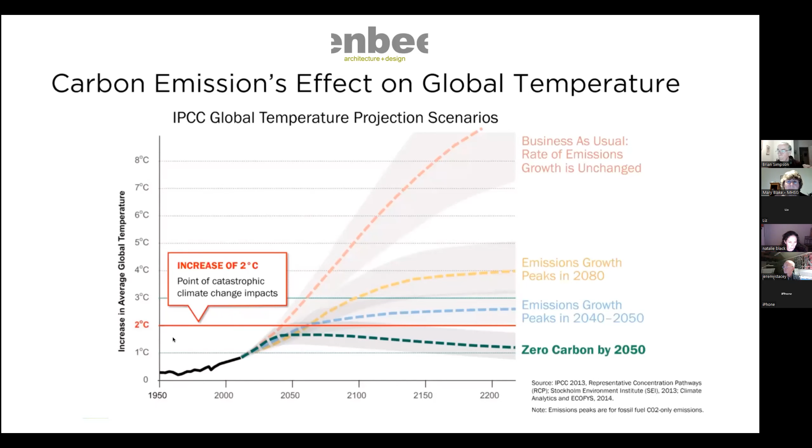So the first thing that I thought about was, what can I do? And a few weeks later, I went to EcoBuild, which is now called Future Build, and I came across a retrofit coordinator course. I also decided to educate myself a bit more about this situation and read Naomi Klein's This Changes Everything. And I joined some local campaigning groups, and we did an event in November 2015.

And I very much felt like this, I felt like standing on a soapbox, but I didn't quite have the courage at the time. And I certainly didn't imagine that we would all be talking about it, that everyone really would be talking about it by this year. In 2015, it seemed a topic that was hard to bring up.

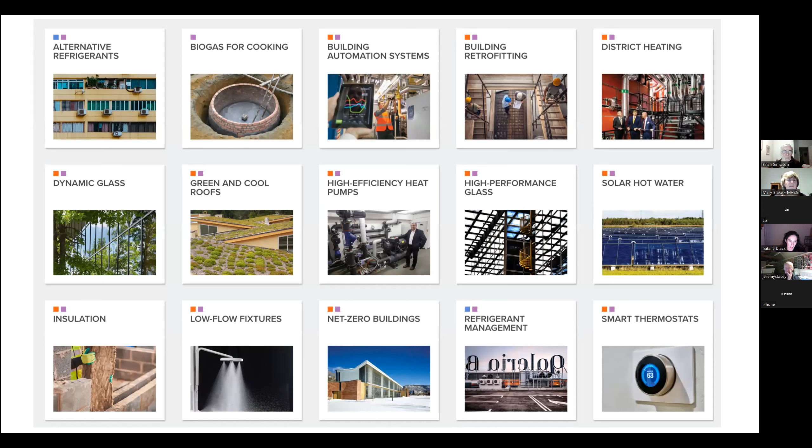And through my campaigning, I came across Project Drawdown, which has 100 ways that you can reverse global warming. And they have a lot of different solutions that are associated with the building industry. This is the ones that they've collected. So it turns out that I could do quite a lot.

And now I want to think about how much our buildings emit. Across the global sector, this is our global CO2 emissions by sector. It's 28% on heating buildings and lighting them, and then 11% on construction. But the construction kind of grows because the concrete and steel industry account for 23% of global emissions, and industry a further 20%.

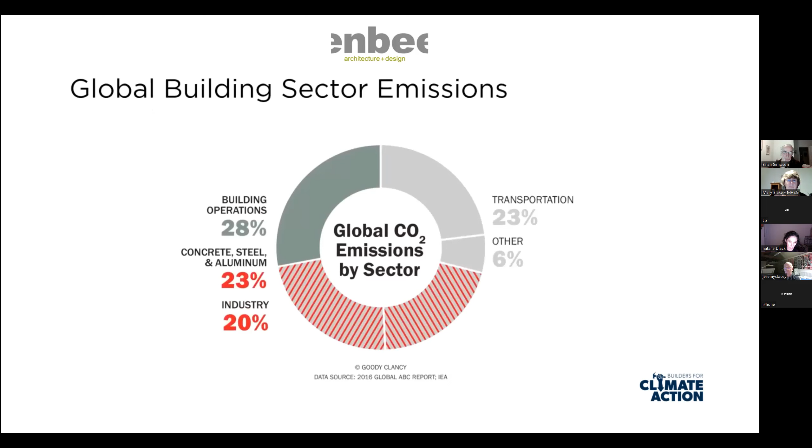So obviously, it's quite a big problem in that buildings emit such a huge amount — the building industry accounts for such a large sector of carbon emissions. But we also have an opportunity.

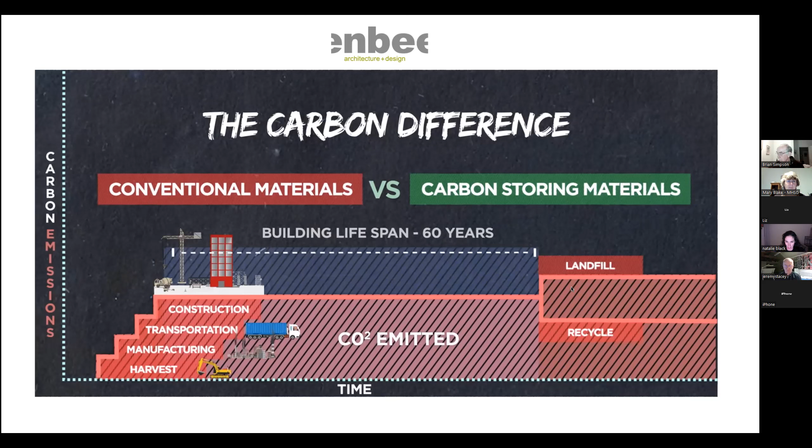And that is when you look at materials. So if you look at conventional materials versus carbon storing materials, which are materials that have grown and stored carbon in their growth, that makes quite a big difference. And this graph shows how, if we're starting at 0, conventional materials are starting at that point and creating a whole load of carbon, and over 60 years it's quite a bit of carbon.

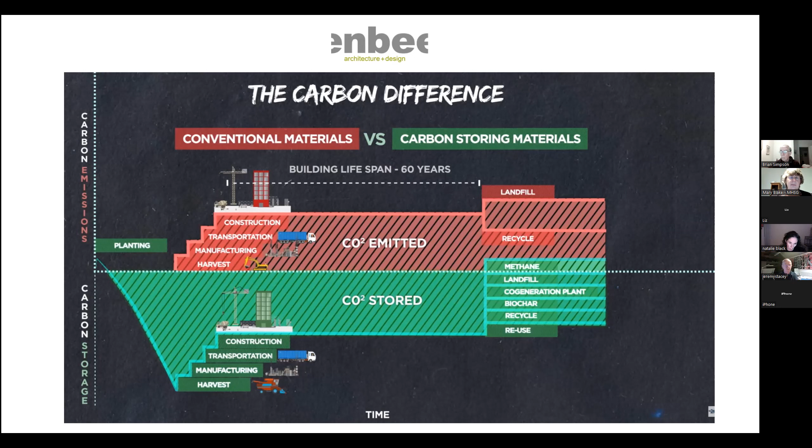And then if you take into account that it's a grown material, you can take that starting point to well below that 0 line. And then the theory is that although you might be using the same amount of carbon to harvest, manufacture and get it to site, you are below the line, and therefore it can be seen as a carbon storing material — it's a carbon storing building or addition to buildings.

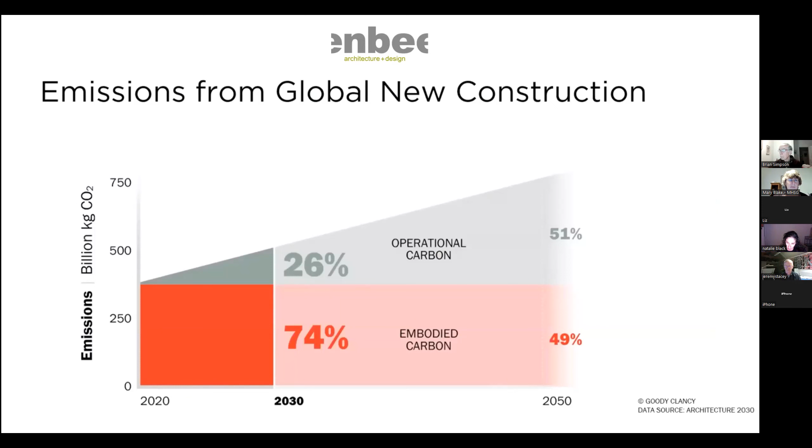So overall, between now and 2050, both operational carbon and embodied carbon end up being about the same amount. So they're equally important.

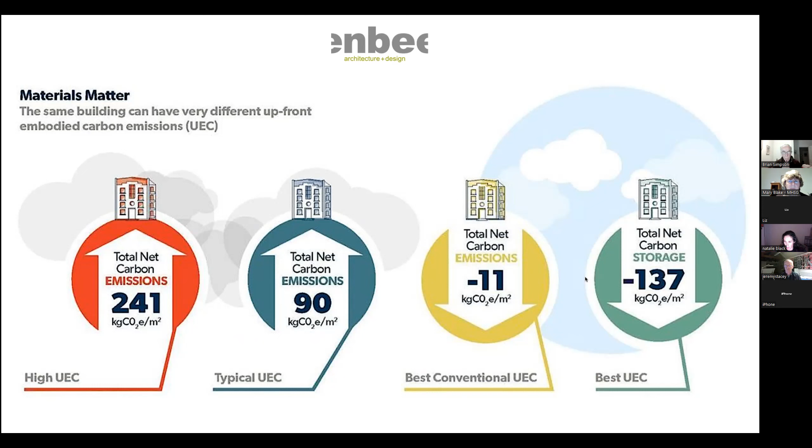And the building that I'm about to talk about could have been done in different ways. Say you had a new build: if you've got high carbon materials, they can be hugely emitting. You can improve the materials a bit and reduce the emissions. I think with us, we got to about the yellow, and I'm sort of trying to take my practice all the way to the green eventually.

So we can pivot the way we live and work so that it's not just an existential threat, but we are part of the solution. And retrofit is important because it's part of the solution, and it provides comfort, improved health, raises awareness, and potentially influences others. I very much believe that it's important to tackle this on every single project.

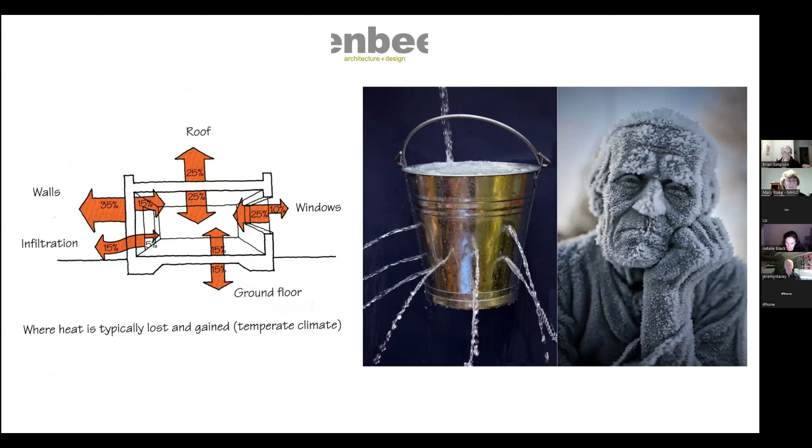And then there's the issue of our old building stock, which is leaking heat quite dramatically. These are some of the average heat losses across the different parts of the building. So we're leaking heat and we're also quite cold. And at the same time, we've got an energy crisis.

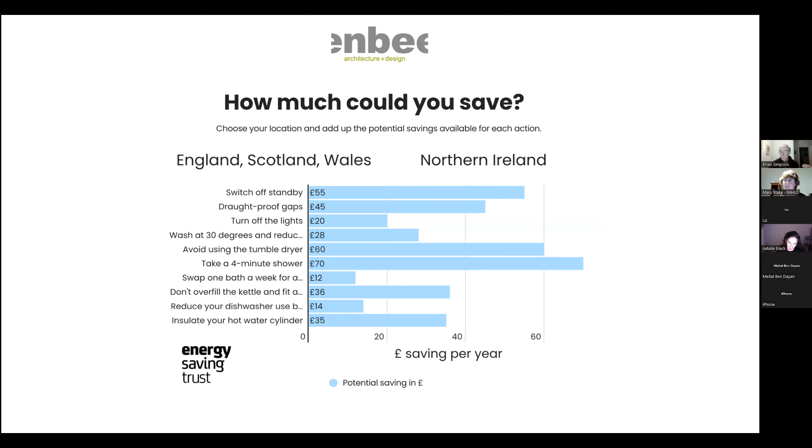This was a funny slide that I came across. Well, not funny, you could say it's sort of tragic and funny at the same time, but some suggestions for saving money, which in the context of the previous slides seem almost quite sad in a way.

Sorry, I can hear somebody talking, sorry. I don't know, excuse me, could everyone mute please? Someone, we're hearing a conversation coming in.

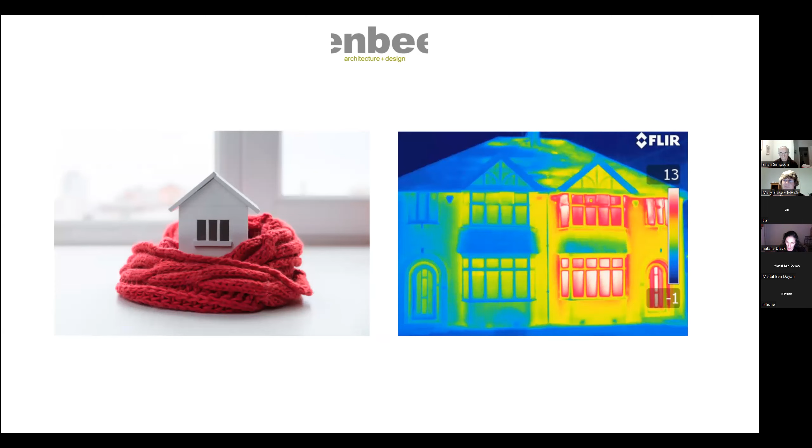Wouldn't it be better, instead of attempting very small savings, to do something like this, where we wrap the whole house in a woolly blanket effectively? The building here on the left has been retrofitted and the one on the right hasn't, and you can see the amount of heat loss coming out of the one on the right through this thermal camera. Just to give you a quick understanding, our homes use 35% of all the energy used in the UK and emit 20% of carbon dioxide emissions.

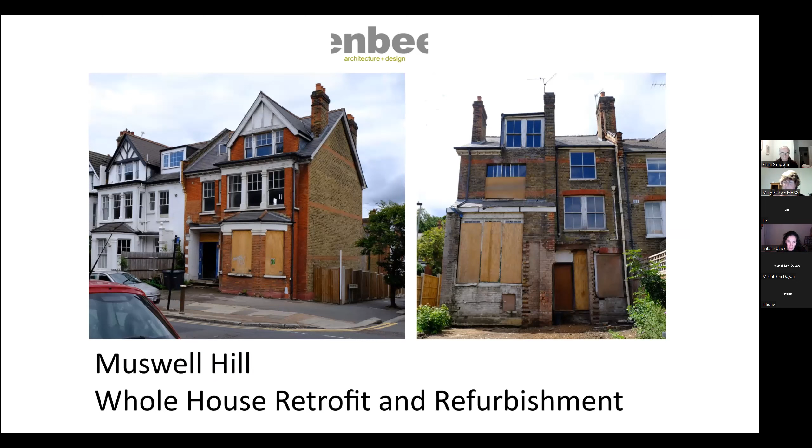So now on to the project. This is what we started with. And this is a bit of the inside once it had been stripped out, and the basement.

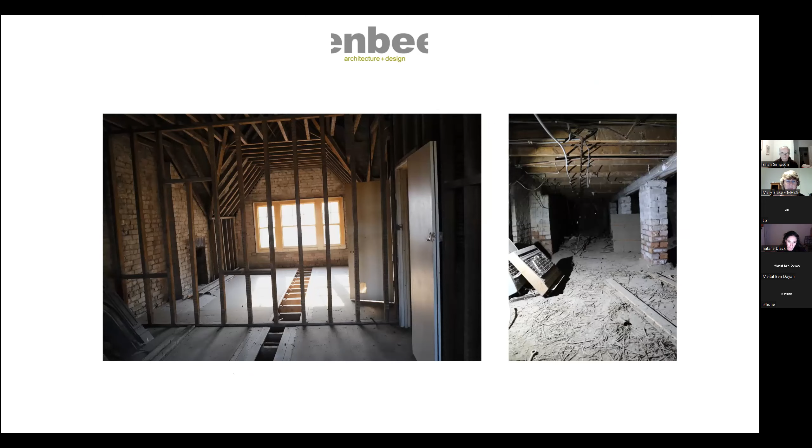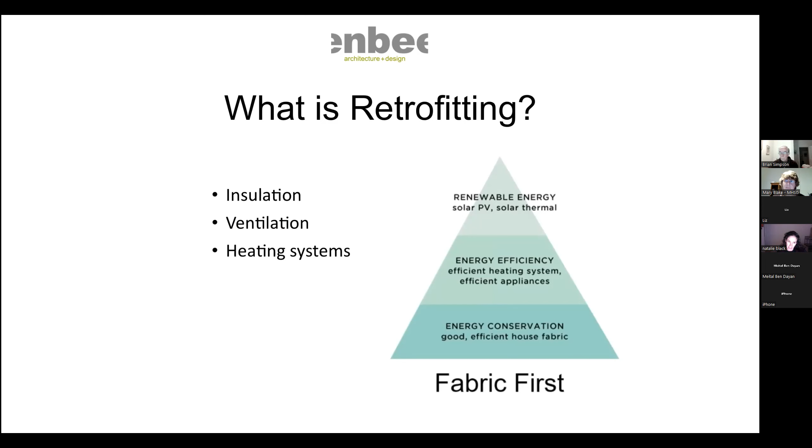Just to recap what retrofitting is, it's tackling the insulation, ventilation and heating systems. Today I'm going to talk in principle about the insulation, and not really touch on ventilation or heating systems.

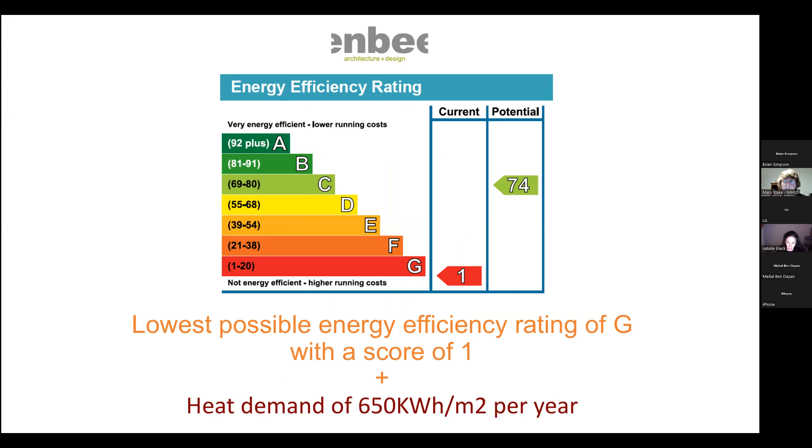We started with the lowest possible energy efficiency, a score of 1, or rating of G, and a heat demand of 650 kilowatt hours per meter square per year.

I didn't know what it really meant, so I'm going to explain. If you look at the typical leaky house, the average is about 300 kilowatt hours per meter square per year. Modern house reaches 150, and the ultimate energy efficient house, a passive house, gets as low as 15. So we started with 650.

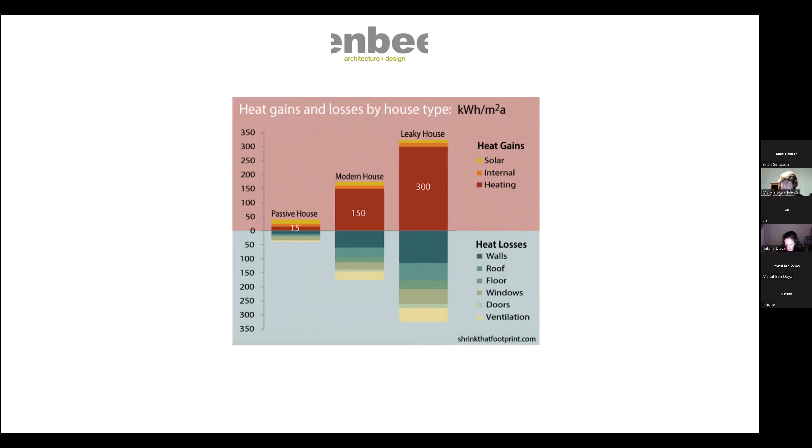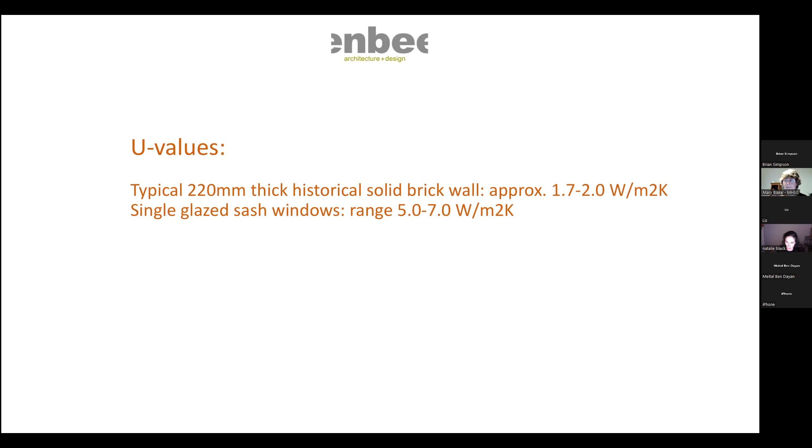We used a passive house planning package to look at the measures we were putting in, in order to work out how much we needed to heat it once we'd put those measures in. So a typical 220 thick historical solid brick wall has a U value of about 2, and single glazed sash windows can range from 5 to 7. I'll keep these figures in mind as I tell you where we took ours to.

So we got the brick walls to between 0.3 and 0.32 - we started with a 2 and got to that. The windows, starting from 5 to 7, we got down to 0.85 to 1. And the rear walls, the roof, the basement and the extension all at 0.15, which are all passive house levels.

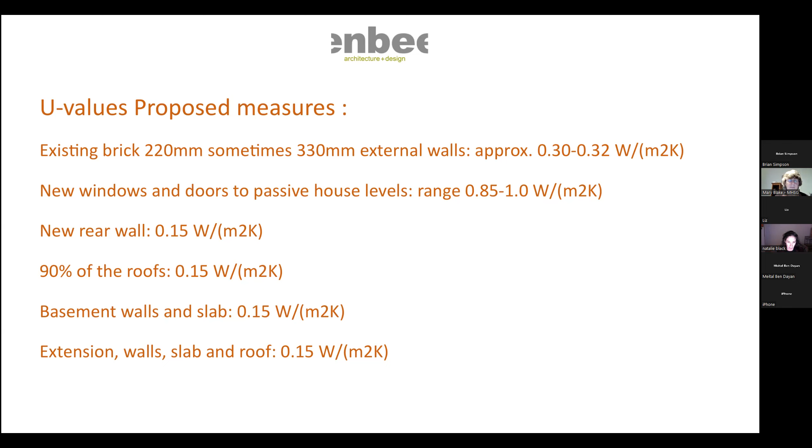To do that, we used natural materials, and the insulation in principle was wood, fibre and cork. And sorry, just go back there, the insulating lime and cork plaster called Diathonite.

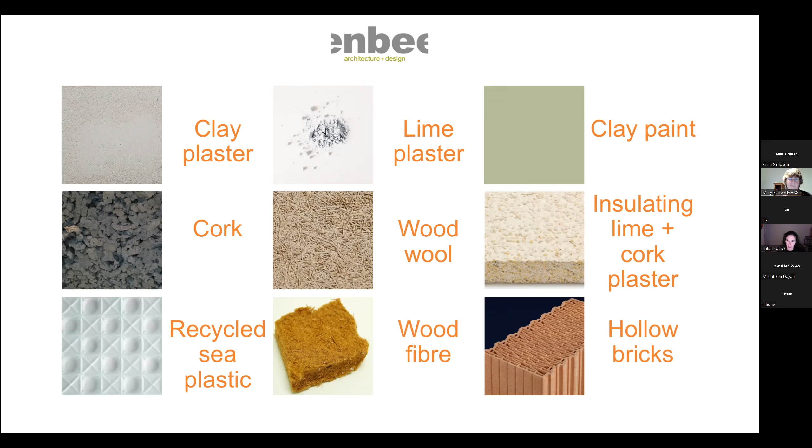So this is what we started with. This is once we'd taken the ground floor out. You can see the ground floor line, the blue line there. And the contractor bought a lot of the materials up front, which are stored on the site because of the huge fluctuations we've had in prices.

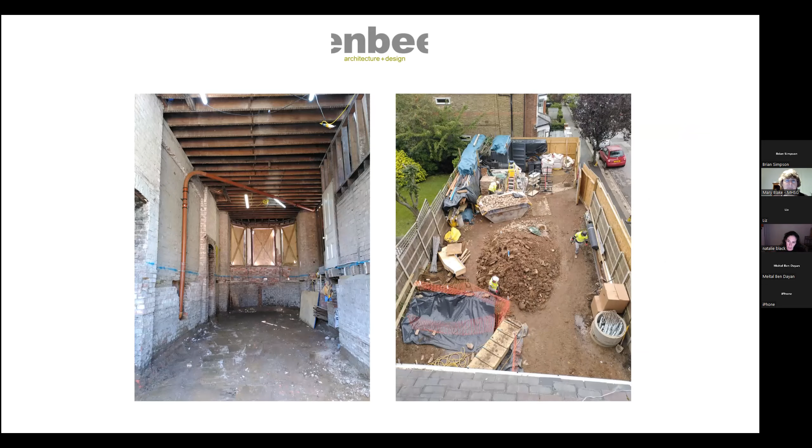Also you can see that they're starting to store the bricks that they managed to salvage from the building. And we took the building quite significantly apart.

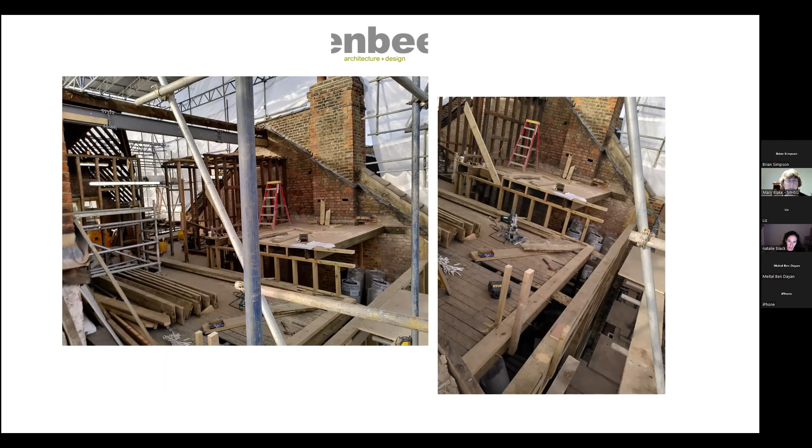Much of the roof came off to have the 2 dormer extensions on the top floor. The back wall was in really, really poor condition, so we also took that down, which was quite a big move, really. And there you can see the back wall was starting to build up again. It was all in timber construction.

And this is again the back wall, and you can see wool. We've got some wool there, and the wool insulation, and the bricks that had been salvaged from when they took the back wall down.

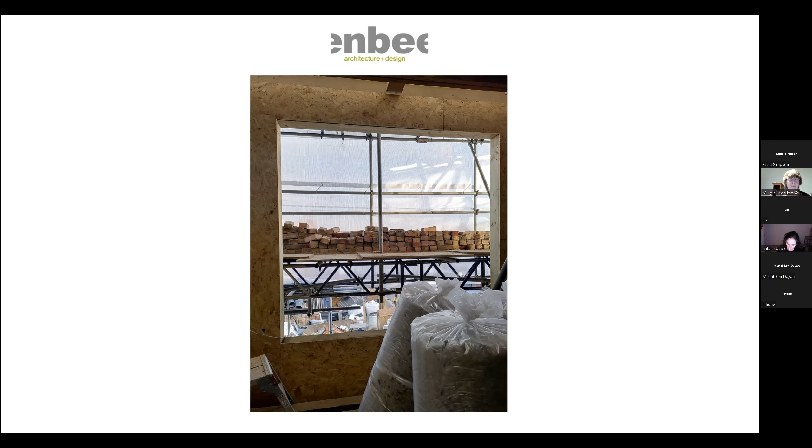Wool insulation is interchangeable with flexible wood fibre, and because the wood fibre was low in stock, we supplemented it with wool as well. So this starts to show you how we then filled the timber frame on the rear of the building back up with flexible wood fibre and then solid panels of wood fibre on top.

The full depth of insulation was 280 millimetres. So 140 was within the timber structure and another 140 on top. And that gave us our new U value of 0.15.

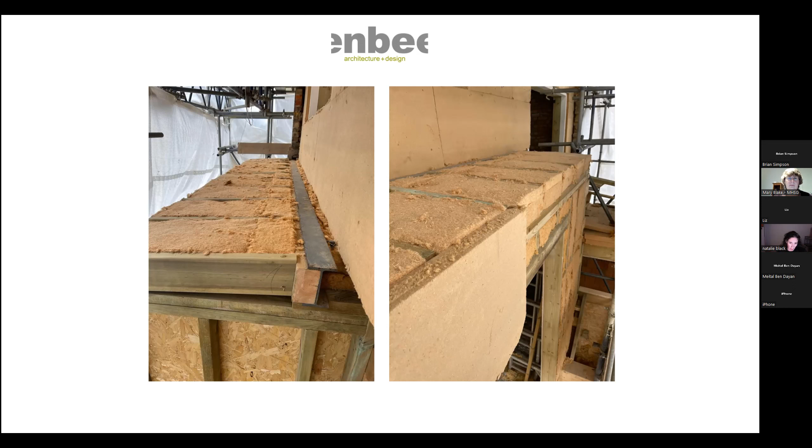And on the left here, you can see the steel structure buried inside the insulation, because it's really important to try and get as much of the structural elements with insulation on the outside if you possibly can. So this, on the left, then got covered up with the solid board of insulation.

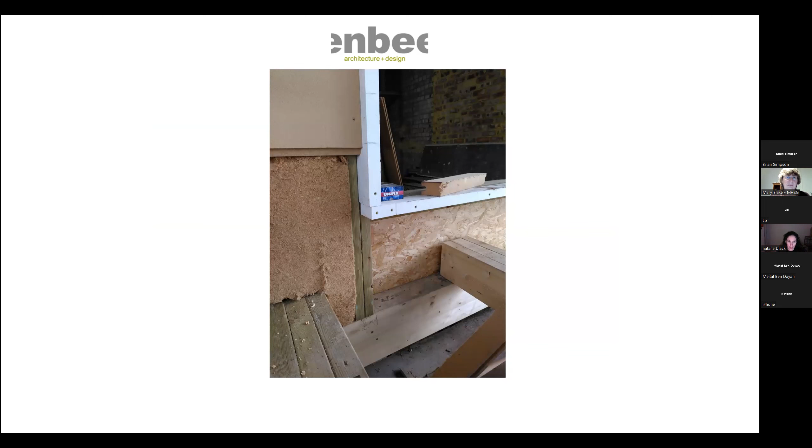And this shows the build up of the back wall that I just described, and then we hung bricks off the back, and there's a 50 mil ventilation zone.

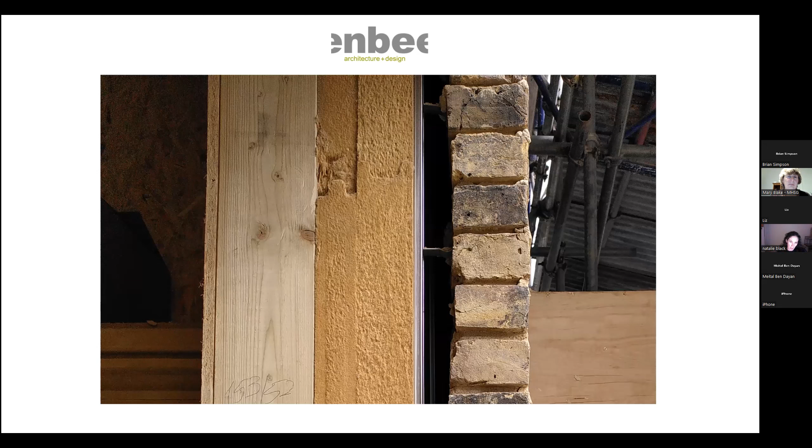And here we also insulated the floors with the flexible wood fibre. This is before they've really put- they put sort of small bits all along the edges to stop any gaps, because the sound will pass through gaps as heat will. It's really important to have no gaps.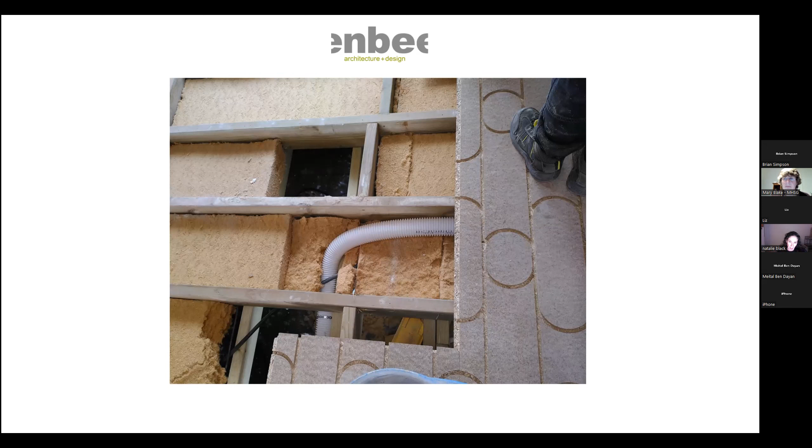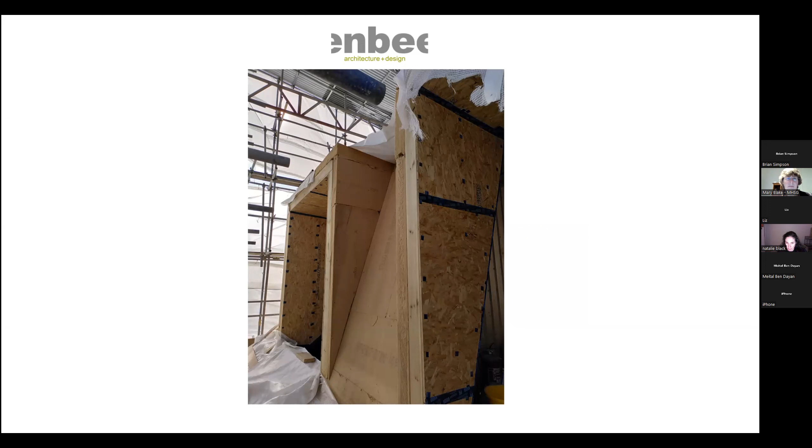And here they've also put a little bit of extra - they've painted over a bit more air tightness on top of the board. And then we lined the whole thing with something called wood wool, which was then able to carry our lime plaster on the inside.

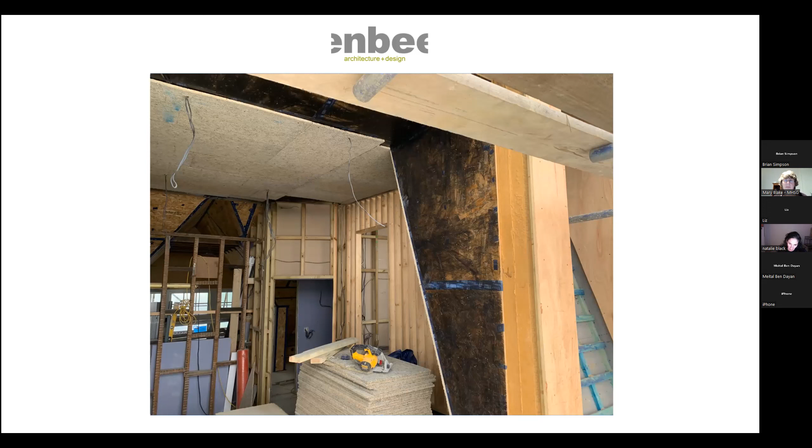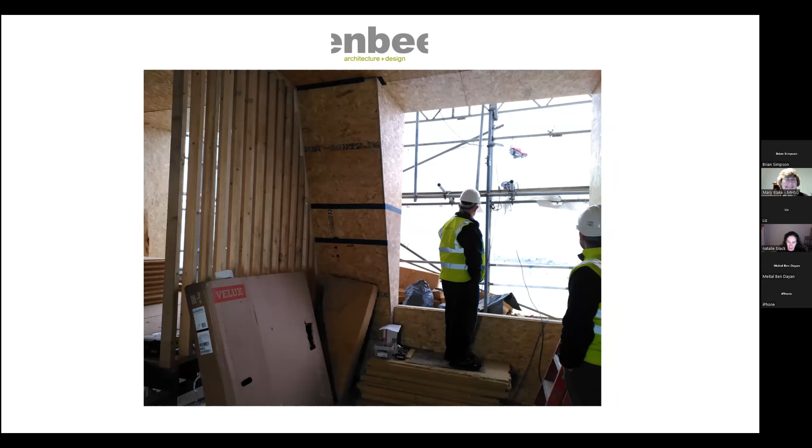Just a quick thing on cold bridges, because I don't have a huge amount of time to talk through everything. Cold bridges are where you've got a piece of structure which has passed through the insulation layer, and you have to be really careful with these because you can end up with the cold passing along that piece of structure and then attracting moisture to it - it's a bit like if you take a cold glass out of the freezer and bring it into warm, moist air, all the condensation forms on it. So you don't want to have a cold element coming into the warm building.

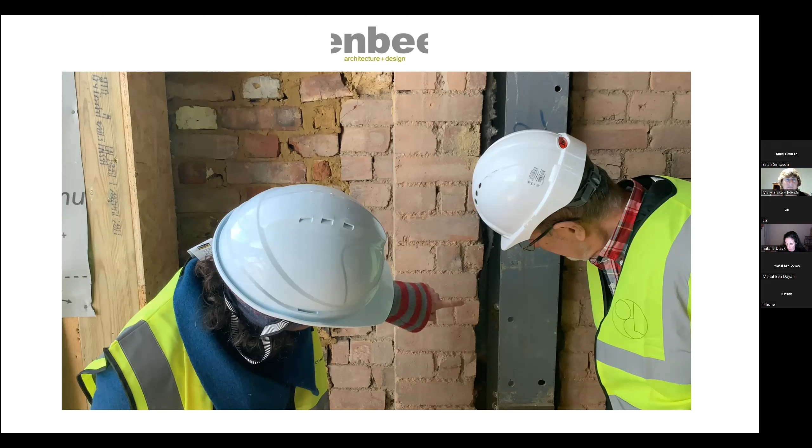And we used a material called aerogel in hard to treat areas like this. It's very expensive, so we have to keep it to a minimum.

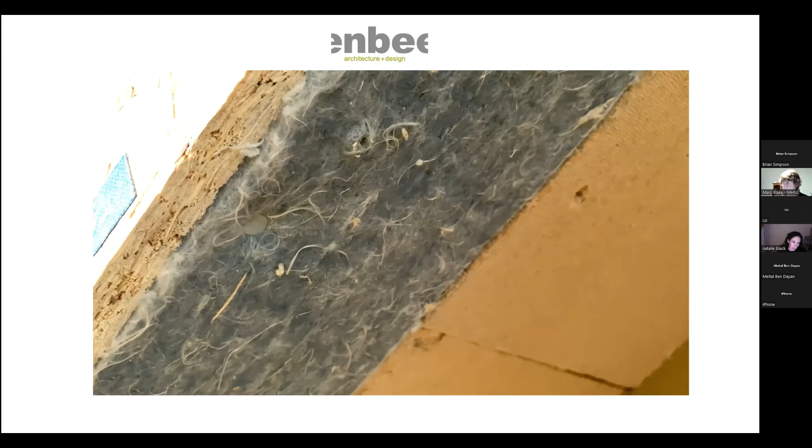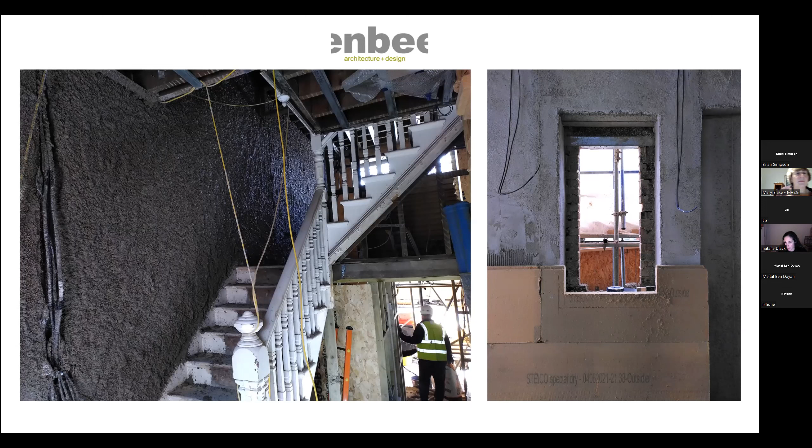Just a tiny bit on the extension - we used a block called porotherm, which is a hollow brick. It's very quick construction. They're trying to decarbonize it, but it is fired - bricks are fired - so it has a carbon impact. However, it works both structurally and, because there's a lot of air in it, there's less brick, and it's also an insulating material.

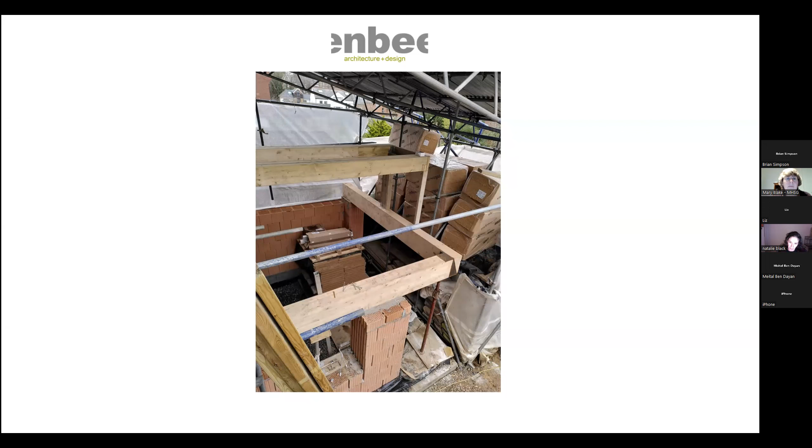On the slabs in the extension and at mid-level, we were able to use this product called Glapor, which is recycled glass. You can get it in slab form and in this sort of coal-like pieces, and it's very good at dealing with moisture, and you can use it below ground. A lot of the natural grown materials, if you put them below ground, there's a risk of rotting, so we tend not to use those once you get into the below ground areas.

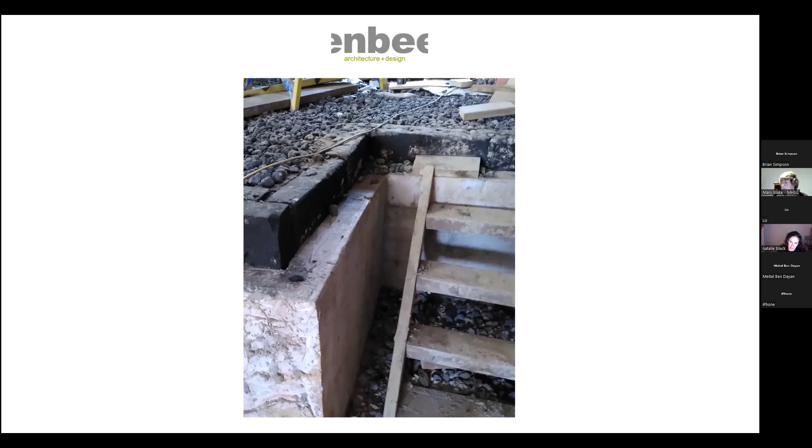And now onto the basement, which is all below ground.

Basements are the most difficult thing to do in a low carbon way. We did what we could, but I wouldn't say we were 100% successful. I'll tell you what we attempted, and you can make up your own mind.

You can see on the right those white panels of insulation. This is a polystyrene-based one called EPS. It's not as bad as PIR in terms of its carbon impact, and it can go below ground, so we used that to line the underside of the underpins. I used something called a Ubakus calculator which allowed me to look at the build-ups.

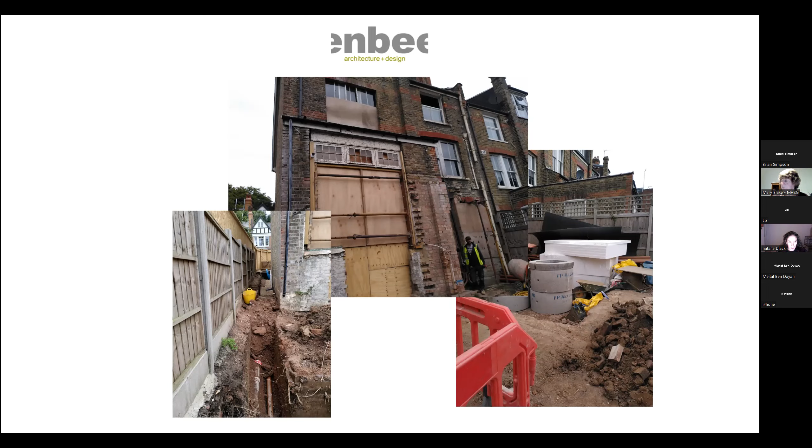I won't dwell on this since there isn't much time, but this started to show me how we might build up from the earth: there's the polystyrene, then the reinforced concrete, then an egg crate material to capture any water coming through, and then we were able to put a cork and lime render on the inside. You can see here it gives me the U value, the fact that it's nice and dry, and its contribution to the greenhouse effect.

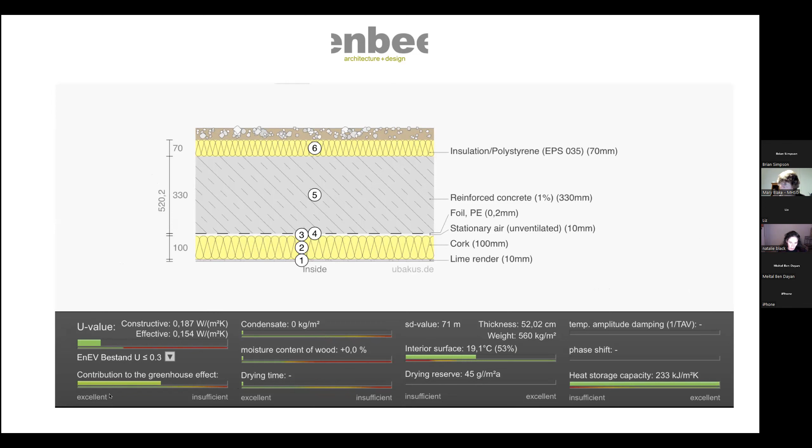This calculator helps me find out if there's going to be water in the construction, and it starts to show it up like this. Once it does that, I look into further investigations through something called a WUFI calc, which we used on the basement to make sure we didn't have any problems with moisture.

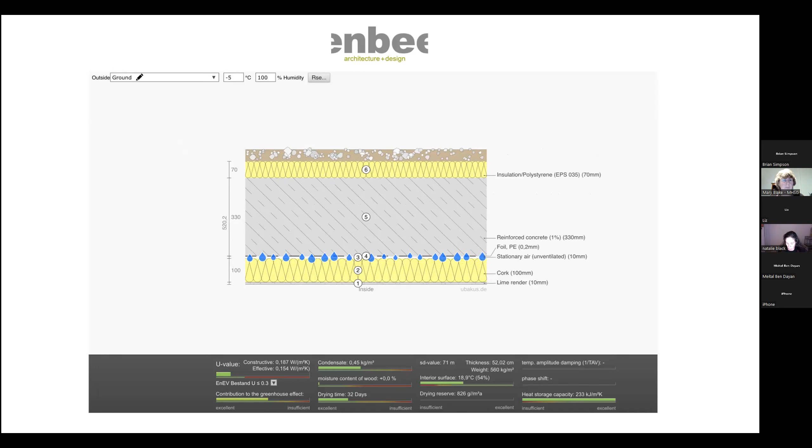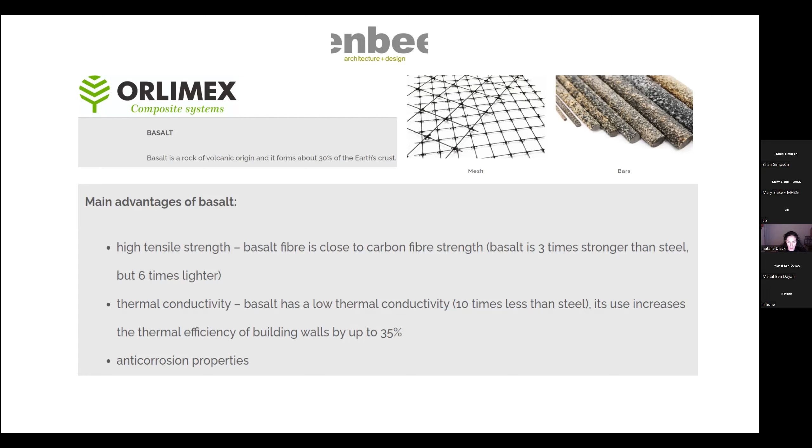One of the things I attempted to do was remove steel from the project, because steel, concrete and aluminium are the highest carbon materials. I looked at using something called basalt bar, and it looked really great in theory. However, in practice, it had the same price point as steel reinforcement bars. When you pour a basement, you need to connect it to the underpins.

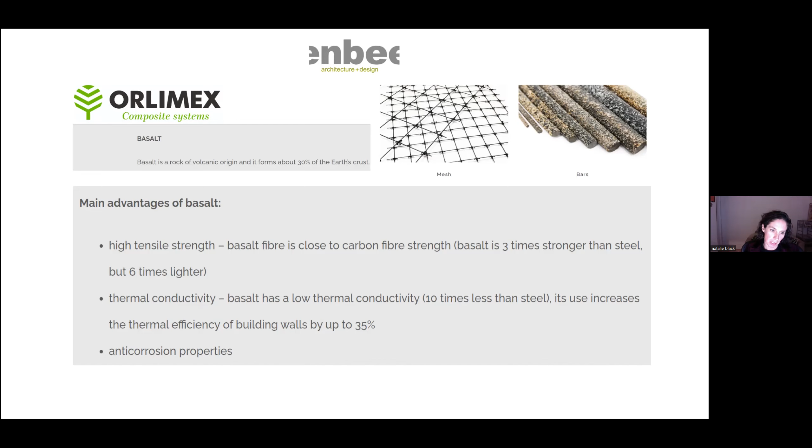The slab has to be connected to the underpins, and you need curved bars at the edges and along the connections. The curved bars turned out to be £48 each, so we had to drop this idea and went back to using steel reinforcement bars. I haven't given up on basalt yet, though - it's something I will continue to look at as a potential replacement.

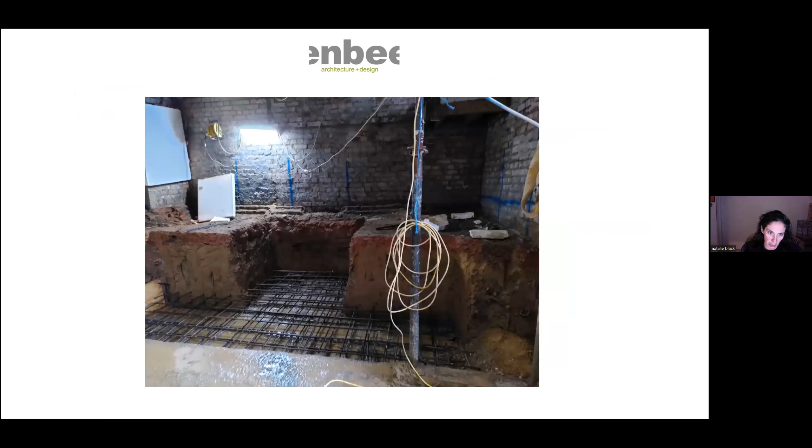So here you can see the reinforcement going in the basement. The other thing we did was get a very bespoke concrete mix, which was - just let me check the time, sorry, I'm running out of time, I'll try and whiz through.

The concrete mix had an insulation called Lytag, making it more lightweight, and we poured it in sections to try and get the largest pour possible. Because it was a bespoke mix, we were the only site using it, and they had to provide us a minimum of 2 cubic meters at a time, which we couldn't always pour. That meant, tragically, my theory of a really low carbon insulating concrete was, in practice, we had to throw some of it away.

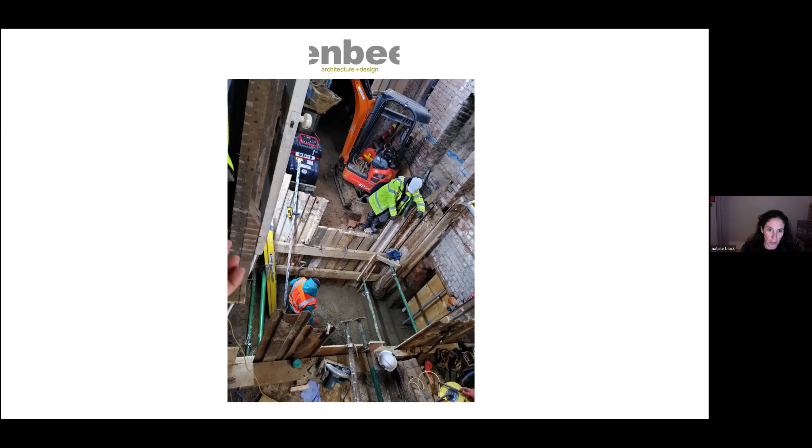We then used cork on the inside, on top of recycled sea plastic, which was stopping any moisture that pushed through the reinforced concrete from getting through to the cork.

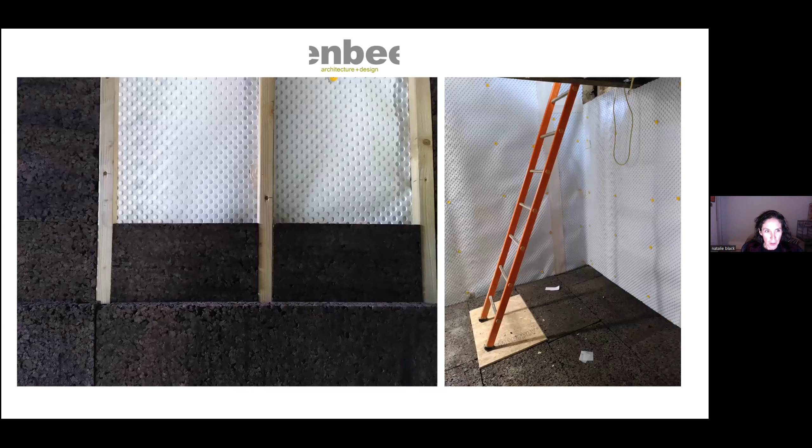Of the high carbon materials we used, 63 cubic meters of low carbon insulating concrete had an apparent effect of a 71% saving on carbon emissions, although the structural engineer isn't fully convinced on that. We had to discard 23 cubic meters of it, but managed to salvage 14 by using it in the extension foundations instead of the blocks we had specified there.

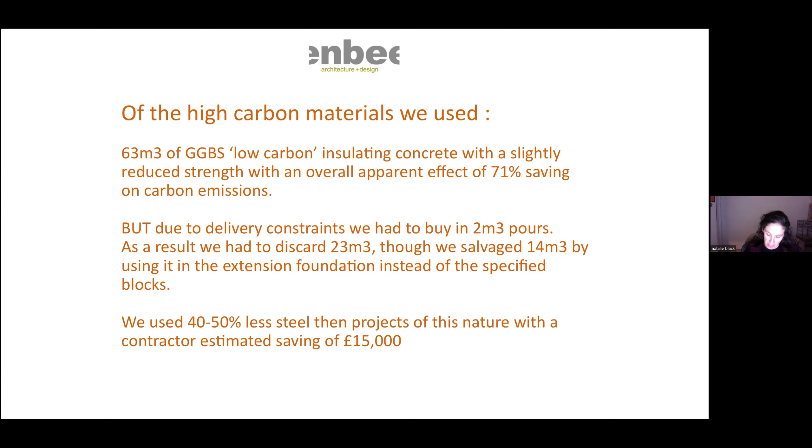We also used 40 to 50% less steel than projects of this nature on all the structural elements of the roofs, in the extension and the top floor, with an estimated saving of about £15,000. And we used quite a lot of wood fibre, cork sheets, structural timber, OSB and wood wool.

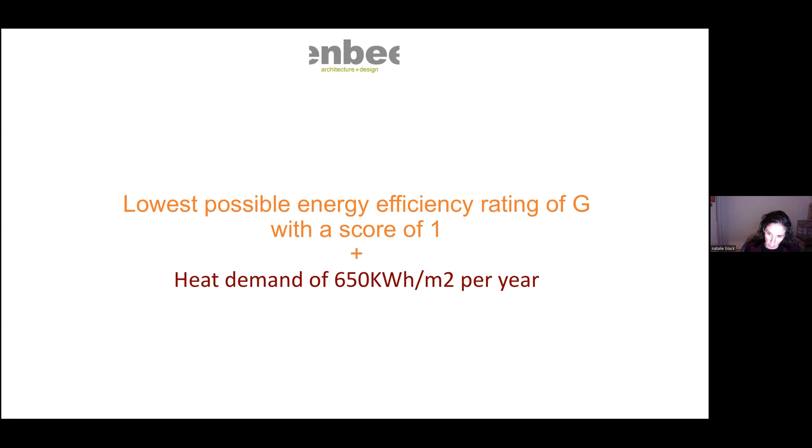We started with a heat demand of 650 kilowatt hours per metre square per year, and we have a predicted heat demand of 30 to 35. Not quite passive house levels, but getting pretty close - passive house levels being at 15.

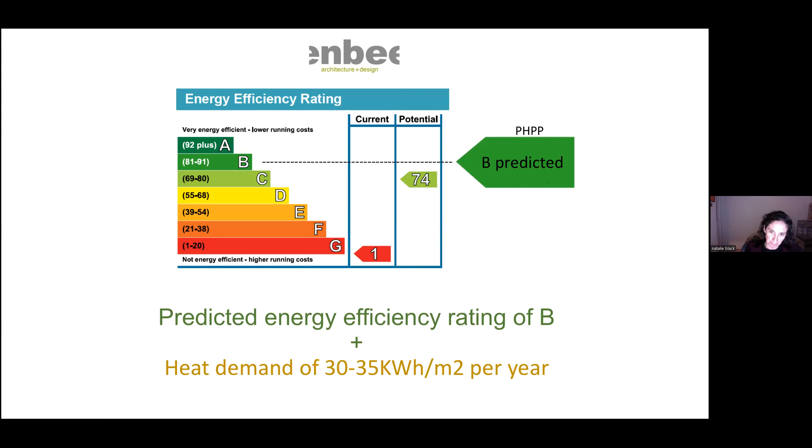That's a 95% improvement. So this is what we started with, and this is how it will look.

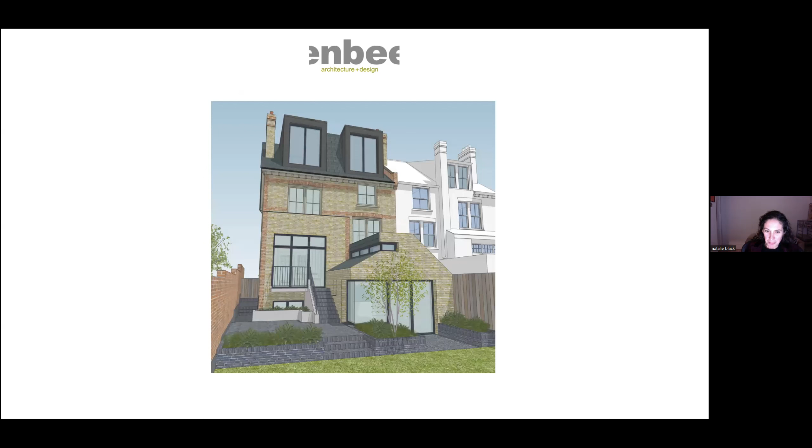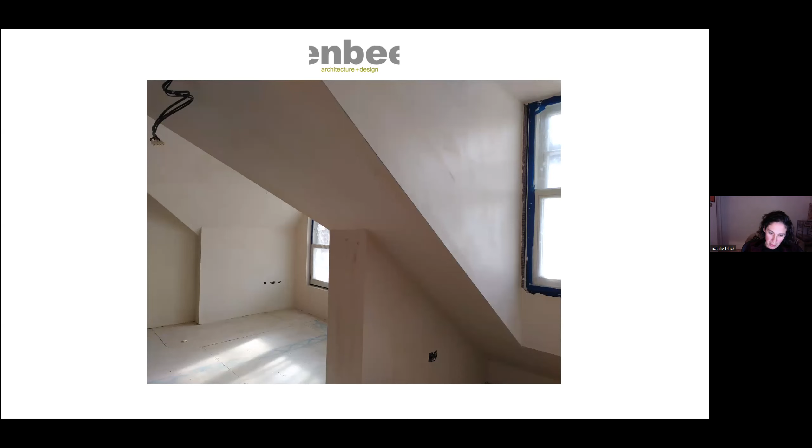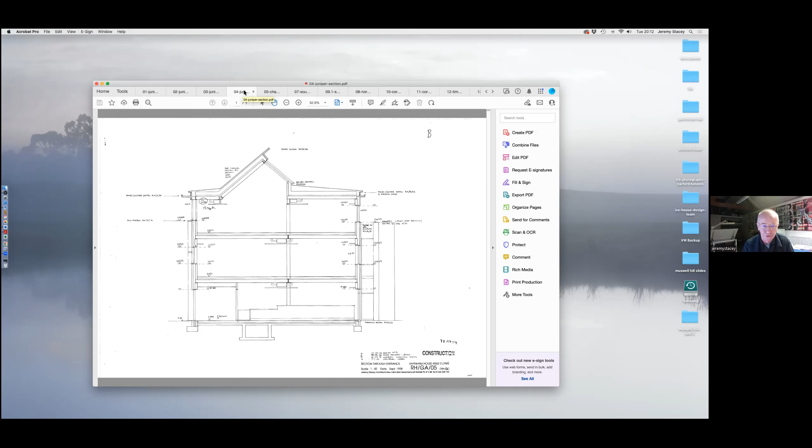I'm very interested in thermal mass. So no air conditioning is needed. At the end of the day, the building's hot. So what happens next is that at nighttime, cold nighttime air purges the hollow cores of the floor planks. By the time people come into the building the next day, let me show you another, here's the building. By the time people come in on the next day, the building's cool. So we're using the thermal mass of the hollow core long span concrete planks. I think the span was over 13 meters. We're using these hollow cores to moderate the temperatures inside the building.

The other nice thing about this is that there are no suspended ceilings. So if you love concrete, and I was brought up as a student in the early 70s really enjoying the work of Le Corbusier, and I went to stay in his flats and in his monastery and so on. But this building, when you go in, you look up and you see the exposed face of the concrete plank, rather than a suspended ceiling with air handling ducts inside.

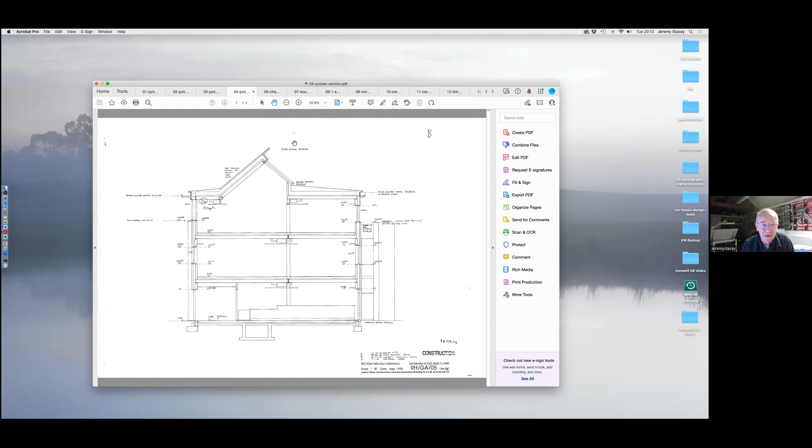Now, if I go on to the next image, here we have, and this is a project we did probably 10, 12 years ago, but it was a cottage and an extension. Now, the cottage we did in completely green. This was really a lesson to us and the client.

We did the cottage using hemp insulation in the roof and hemp on the walls. Initially the cottage was covered with cement render. One thing about brickwork in cement mortar or cement render is it doesn't breathe, and as soon as you get a crack in it, water gets in and can't get out.

In the winter, the water freezes and blows the render. So on the cottage, we insulated with hemp between the original timbers, which were all restored, with lime render on the outside and lime plaster on the inside. On the floor we used glass insulation pellets, a limecrete floor, and recycled Norfolk clay pamment quarry tiles. That's the cottage.

But next door, still holding on to my love of thermal mass, the building is in concrete blocks with EPS insulation and a thin coat render on the outside. In places it's covered with timber to represent what was happening in the building.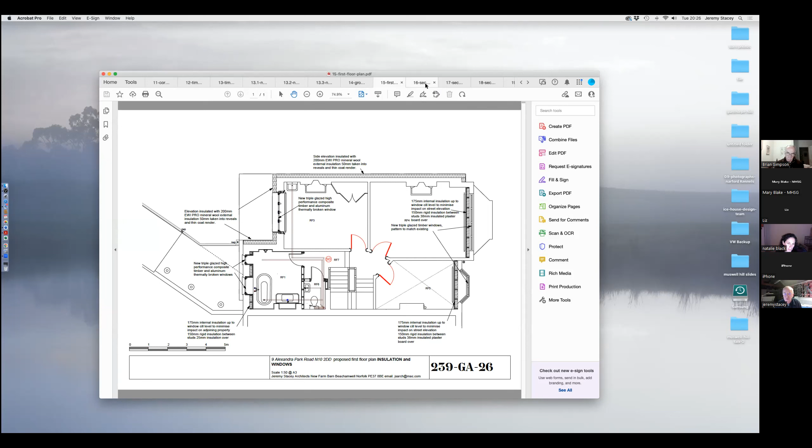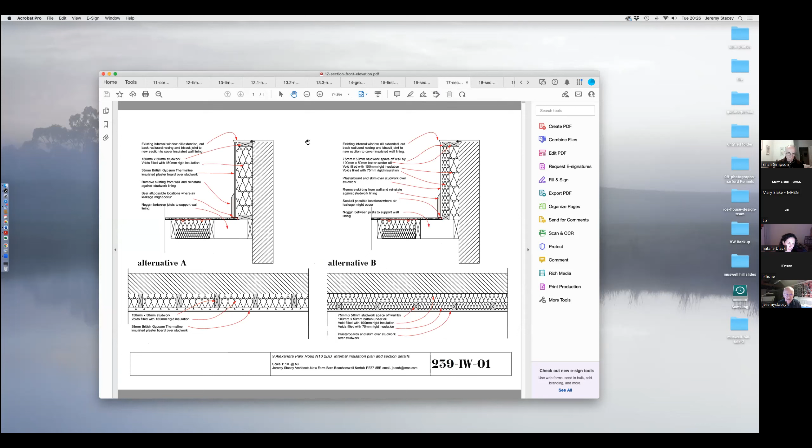This is a detail of how we did the insulation at the south facing windows by building a stud wall and packing it full of insulation. Here's a section through the building. As you can see, this is all open, so it would be good to have a fan up here, because we had underfloor heating in between the floor joists, and the fan would send that heat back down again.

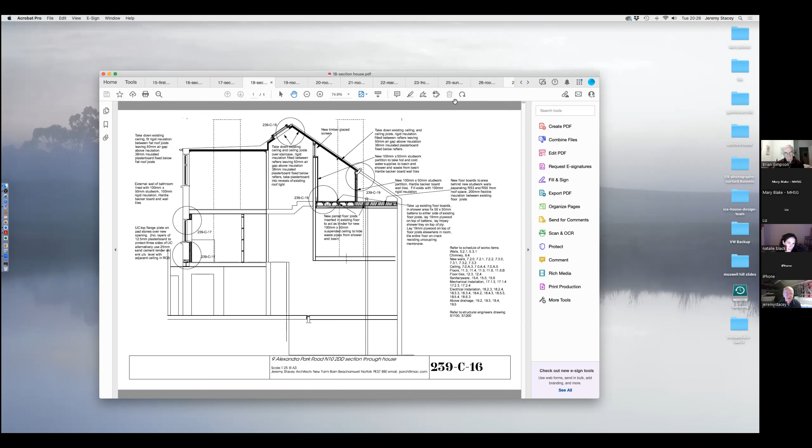And looking at the roof details, we had 2 areas of roof. We had the dormers on the flat roof at the back.

We had someone help. So I work with a very nice chap called Colin Williams. He used to be a bricklayer, then he became a building inspector, and then he did a PhD on clay lump buildings. So he's an expert on clay lump, but I've yet to find a client who wants to build a clay lump building, because with clay lump, you dig it out of the ground on the site, so there's no transport at all, and then you build it. And Colin, as I say, he did a PhD on the subject, and if anyone is interested in doing a clay lump extension, I'm sure he'd be interested.

But at roof level, we put 100 mil of insulation between the rafters, 75 under the rafters, and likewise on the flat roofs, 130 above the flat roof and 100 below. So we had 230 there. And when dealing with different thicknesses of insulation, you need to put the thinner insulation underneath the thicker insulation. Otherwise, there's a risk of interstitial condensation, which would occur at the junction between the two layers of insulation.

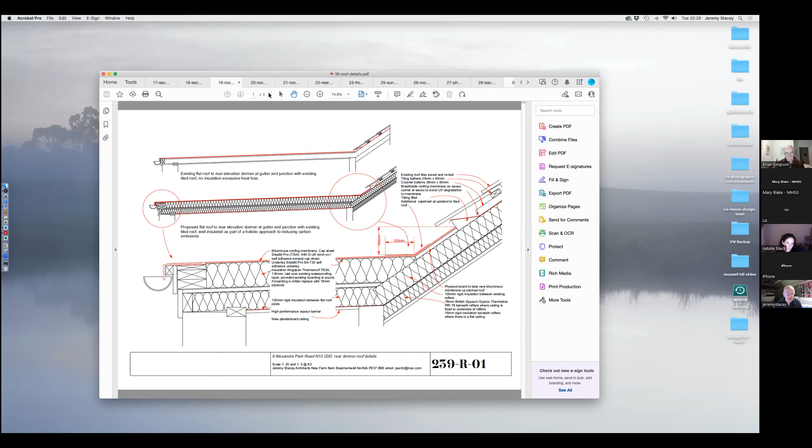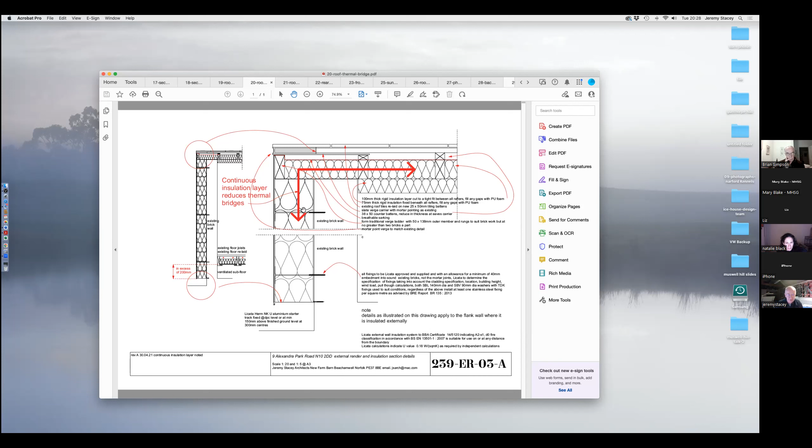Now, Natalie mentioned thermal bridges. It's very important to avoid thermal bridges, which is where you have the risk of a cold part of construction facing the external air coming to the inside. So as we are placing 200 millimeters of insulation on the outside of the building, we needed to extend the roof 200 millimeters to cover that and insulate the top. Likewise, at the back of the building, where there are some lower pitch roofs, we ensured that we reduced cold bridges by extending the roof and adding more insulation.

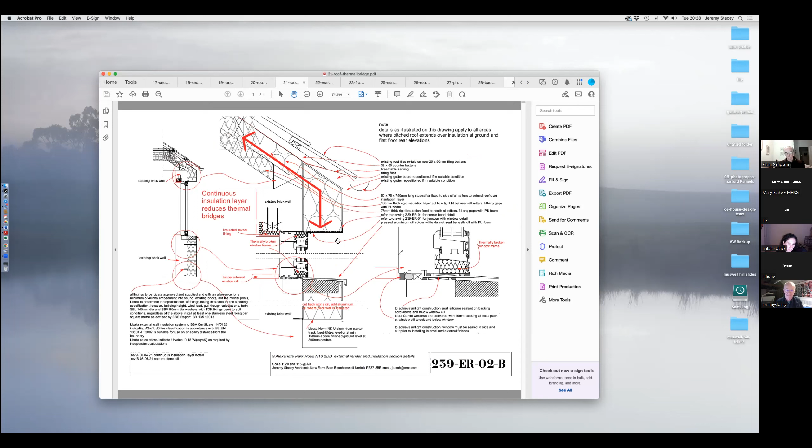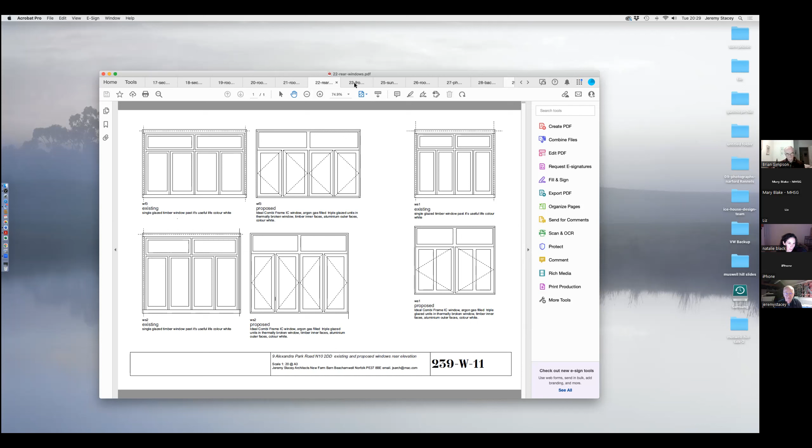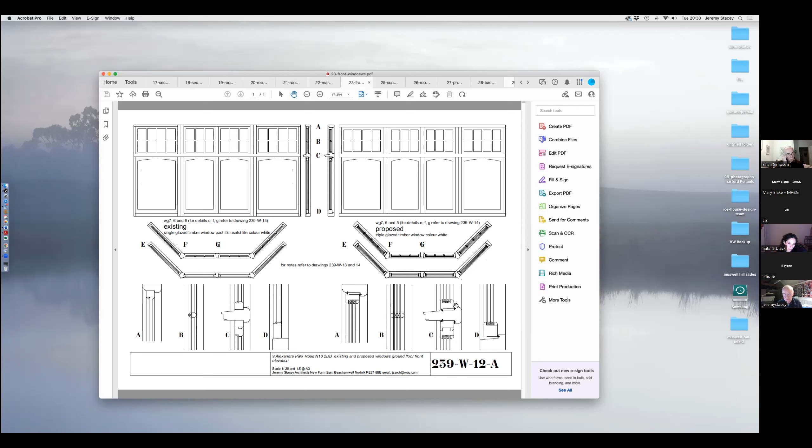In the end, we decided to use double glazed, and we used on the front windows insulating glass. So it's double glazed with one thick layer of glass, I think it's 12 or 15 mil, and one thin layer of glass. And the overall thickness of the glass panel was such that we didn't have very heavy timber frames. So it looked, in effect, the same as before.

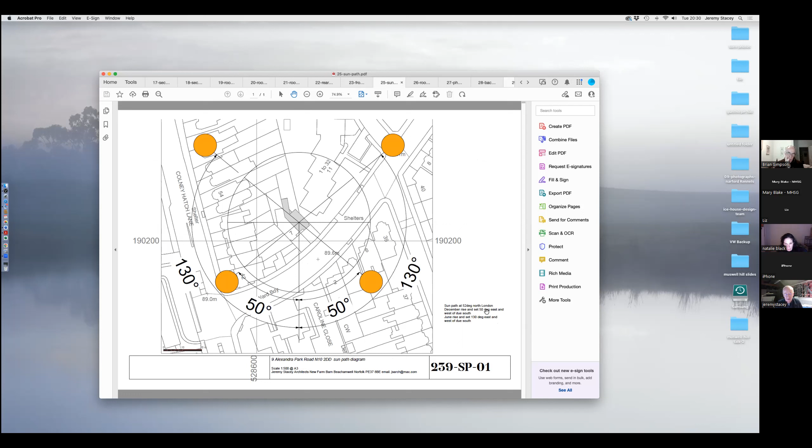Now talking about heating, I love to draw sun path diagrams on buildings, showing where the sun rises and sets. This then encouraged us to have photovoltaics.

In the summer months, Nadia and Zachary haven't needed any electricity.

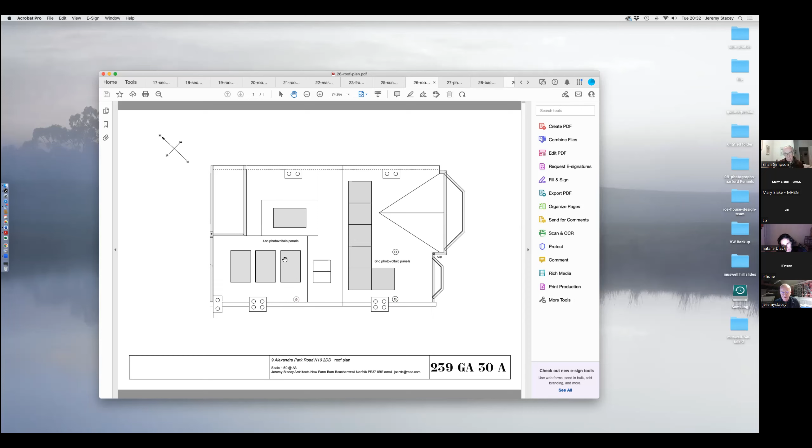The reason I was particularly keen on photovoltaics was that the building would be heated with a heat pump. I spent a long time at the beginning of the project advising the client, because I was very worried about their heating bills, as at that time electricity was 3 or 4 times the cost per kilowatt hour to heat than gas. The client was very keen to avoid gas because of carbon emissions, and also keen to avoid poison and stuff coming out of flue gases. So even though we wrote a lot about improving the air environment of the area, it didn't, until the very end, cut much mustard with the planners.

This is just showing how the photovoltaic panels were recessed into the roof.

Another issue: because we were increasing the insulation, we needed to raise the roof level by 28 millimeters, which again was one of the areas the planners were concerned about. We had a meeting with the local councillor, and frankly a roof of a Victorian house would be out by 28 millimeters from one side to the other anyway. But we had to do that so that any water coming through the tiles could drain off.

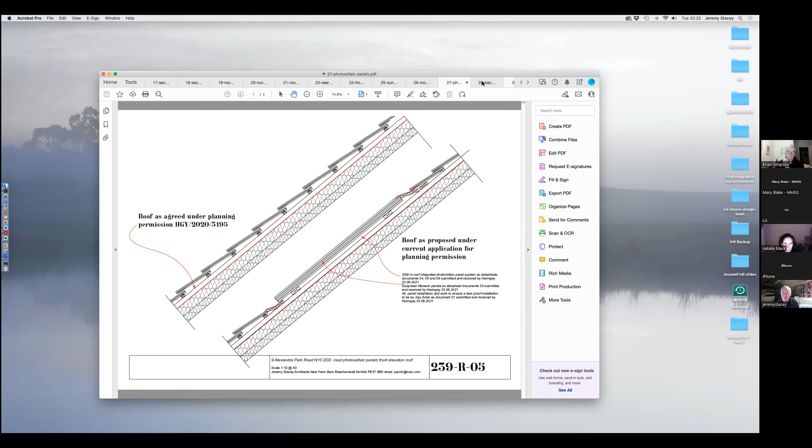So we recessed the panels on the front elevation, and it looks pretty fine. So there's the project completed.

On the inside, up to windowsill level, it was insulated on the inside. Windows at the rear were triple glazed, aluminium, thermally broken windows with timber frames inside. On the front, we used a thicker glass which had the same U value as the triple glazed windows at the rear. So, Mary, I've overrun.

I better stop. That was splendid, thank you very much. I'm returning.